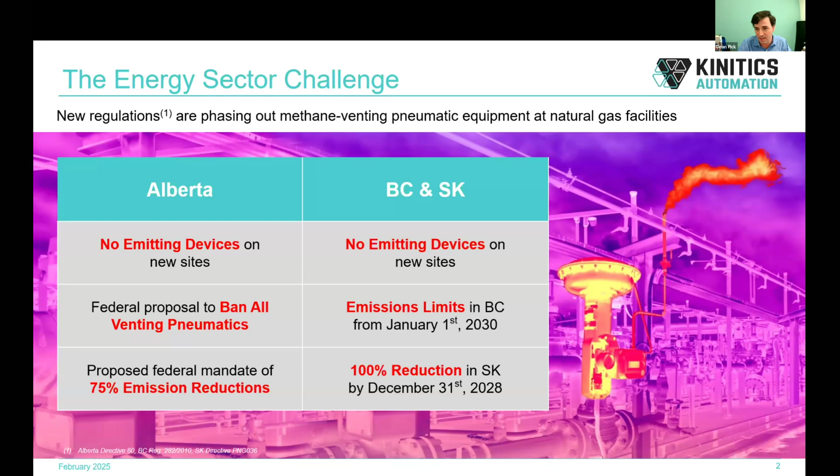So this guide is meant to be for EPCs and packagers and producers who are planning new infrastructure projects such as new wells, etc., that want to maintain compliance, but obviously don't want to completely reinvent the wheel when it comes to existing designs that they have tried and tested. It's also relevant to companies that are looking to address their installed base of venting pneumatics.

So to provide a little bit of an introduction to the issue, the source of methane emissions from these devices, when it comes to control valves, which is a large percentage of the source of these gases, is the practice of using gas from the pipe, sometimes referred to as fuel gas, natural gas, or methane, as the gas that runs pneumatics. So pneumatic controllers, mechanical computers you could think of them, basically use this gas to control the position of control valves, shown here schematically as a cross section.

And these controllers effectively utilize the gas, but they don't destroy or consume the gas. It is a pass-through system where ultimately, once the pressure is spent, in addition to other escape mechanisms that occur, you now have a source of venting, either continuously or intermittently, depending on how the system is set up.

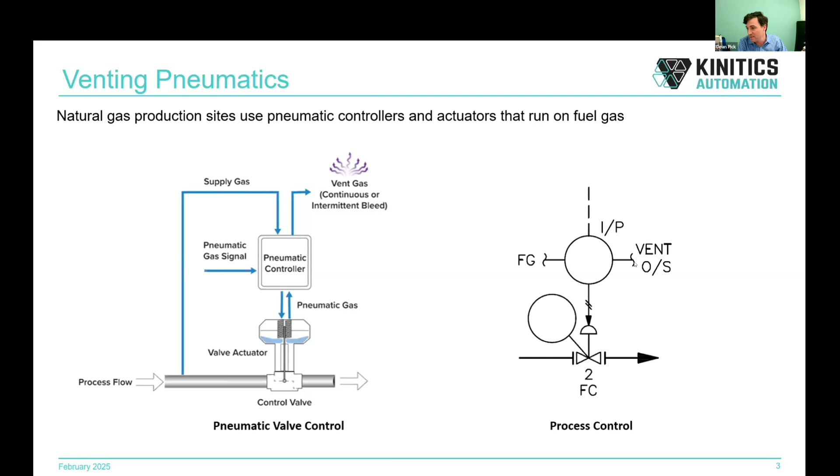These are the gas that's used to control that valve, and then vent OS, or vent outside, is sort of that telltale indicator that you're running a pneumatic device at that facility. The control in this particular example, I/P, is where you've got current control, i.e. a 4 to 20 milliamp signal coming from your SCADA system or PLC system, driving the pneumatics, and that's effectively controlling, in a lot of respects, the flow of that methane gas out to atmosphere.

Now, if we look at how to address this, either for greenfield projects where you may not want to reinvent the process, or for projects where you're looking to reduce your venting volumes. In a lot of cases, the valve itself is not the culprit, or is not necessarily the target for addressing these venting volumes. It's really the actuation system, the pneumatic actuator and associated controller that needs to be addressed.

So there's a lot of benefit and value with reusing that valve. So really the attention turns to the actuator. What can we do to automate this control valve in a way that doesn't introduce venting pneumatics? So we're going to, through this guide, address different considerations such as operating environment, mechanical interfacing to the existing valve, how you're going to power and control it, as well as safety considerations.

So in this guide, we're going to use the Kinitics KVA38 as an example replacement. So this is a zero-emission electric globe valve actuator that features a built-in return spring, suitable for new sites as well as brownfield retrofits. That's been designed to provide the lowest cost of ownership to the users, both from a combined consideration for CapEx, but as well operating costs.

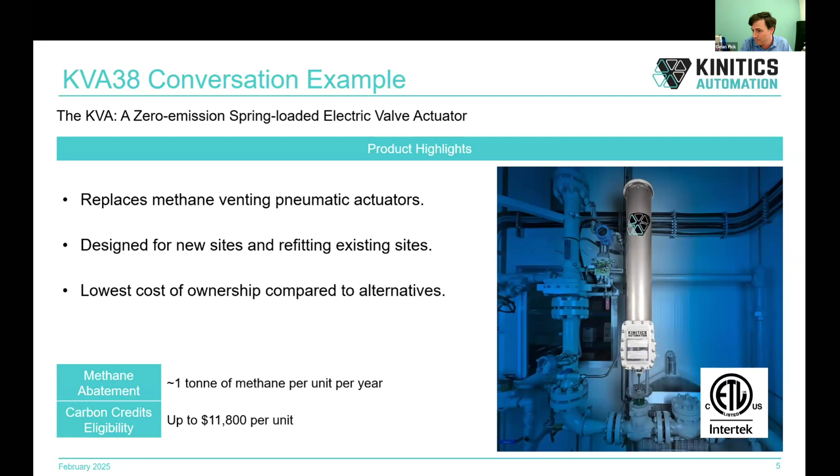So let's start at the valve. First step is looking at the valve travel and thrust requirements. Travel is usually the easiest thing to find. Pull up your valve spec, pull your valve list, and you can usually identify the type of valve it is and how much lift there is.

Sometimes you might find a special case where the valve may be rated to travel 3/4 inch or 19 millimeters, but in your operation has been intentionally limited, let's say to 1/2 inch of travel. So you can then choose to acquire an actuator that can either do the full lift or just the limited lift that the application requires.

The other component is thrust. So important to remember with globe valves, they work up and down as opposed to a rotary valve, which is turning or torquing. So you need to consider how much thrust you need in order to basically keep the pressure in the pipe, so to speak, when the valve is closed. So you need to look at the type of valve, whether it's balanced or unbalanced.

In this case, we're showing an example of a D-body valve. So this is an unbalanced valve where the pressure is being held back by a plug that's seated into a valve seat. And when it's holding back pressure, with the pressure side shown on the left here, you have to develop at least enough thrust to overcome that unbalanced nature.

So that does include, I'm going to skip to the third point here, the maximum differential pressure. Look to your process flow and P&ID, look to your design to understand what the possible maximum differential pressure across that valve is. You combine that with the port size, otherwise known as orifice size, which is taken as the cross-section, at least in the unbalanced valve, of the plug.

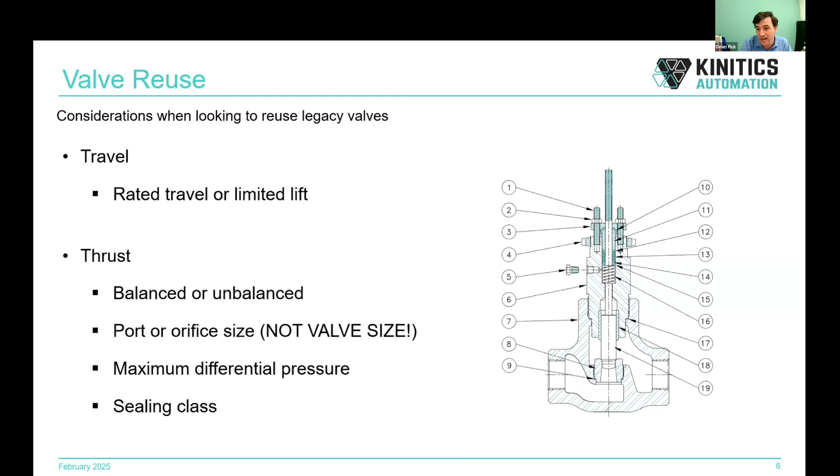And then another consideration is the sealing class, just how tight that needs to be. Again, we're not suggesting any change to the, let's say, tried and true process control. It's more of get the data you need in order to evaluate an actuator for replacing the venting pneumatics.

Other considerations include the operating environment. A very important safety and jurisdictional regulation consideration is the hazardous area location. In Canada, we're now using the zone system. So look at your zone rating, could be zone 1 or zone 2. In the case of the Kinitics valve actuator, it's rated for class 1, zone 1, so it's applicable in either zone 1 or zone 2 configurations, as well as div 2 for the legacy sites.

You can also look at the temperature range, especially the low temperature range, for those who have some experience with exposure to the weather. We just need to step outside today to kind of feel what that is like, and it can be rough on some equipment. In the case of the Kinitics KVA38, it's rated down to -40 degrees Celsius, so it can handle the cold. It can work in outdoor climates or outdoor installations. And it's good for up to 50 degrees Celsius. So it covers a wide range of operating temperatures.

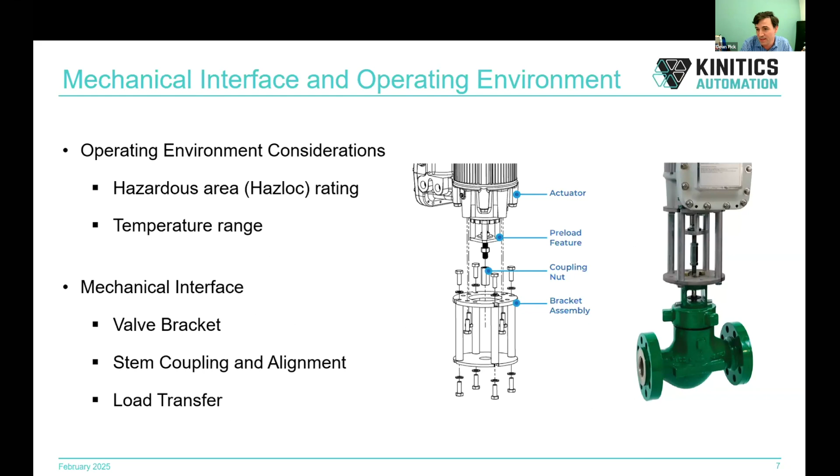Obviously in greenfield, when you can do it in a shop install. But if you have information on the valve, we can use that to identify the right hardware to allow you to couple the stem, mount to the bonnet of the valve, and otherwise then transfer the load from the actuator to the valve, i.e. that's the load of the internal spring, which can then do its job, keeping the pressure back in the valve.

Now look at power systems. 120 VAC or 24 volt DC has a lot to do with your on-site infrastructure. The consumption or the power demand is always an interesting conversation. It really comes down to what your process looks like. So consider your process. Whether you're doing dump valves, so intermittent lifting and dropping can be very power efficient on a snap acting case, or if you're looking for constant modulation for back pressure control, for example, also a consideration as well. So bring some process information and we can help you with power demands. It is not a simple answer in any case.

As far as control system interfacing, the example we're using today is an analog input. So we're going to use 4 to 20. Serial communication or discrete points are also available. And you can now maybe also start to explore some automation enhancements. Position feedback, something maybe not available before, to actually tell you where your valve is, as opposed to just commanding it and hoping for the best, as well as advanced diagnostics to tell you how the actuator is doing and potentially even the health of the connected valve, all providing you with intel that you might not have otherwise had with your old infrastructure designs.

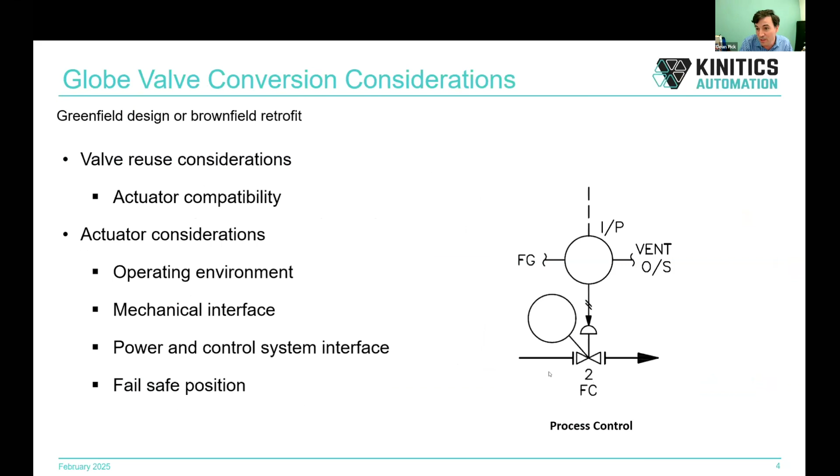And lastly, fail-safe is a key consideration. If we go back to that image of the process control, FC here stands for fail closed. The number above it, 2. That's a 2-inch valve. Again, remembering that that's not a 2-inch port. So how to achieve fail closed? With the Kinitics valve actuator, it is a spring-loaded valve. So if you lose on-site power for whatever reason, if you lose a control signal, even when the actuator is in a cold, dead state, the internal spring will return it to the closed position. This is very much like how the pneumatic example at the start of the guide is operating, and this is how the KVA 38 works.

If you're looking at alternatives such as motorized operated valves, you're going to have to consider other things such as the super cap or battery backup that is essential to providing an alternate form of power if it goes dark, that is site going dark or actuator going dark. Of course, none of these solutions can replace whether the motor fails, in which case you're dealing with a fail in place and it has to be picked up in your HAZOP studies.

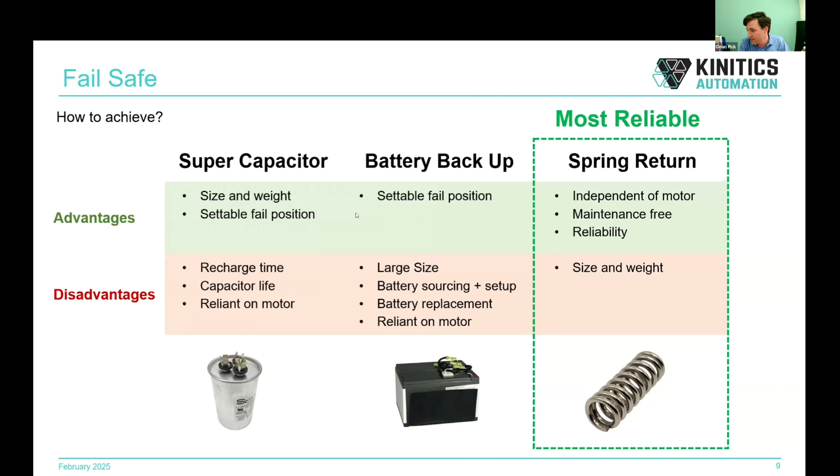So ultimately, it's up to the designer how they're going to achieve fail-safe, keeping in mind the additional CapEx that might come with some of the battery or super cap backups, in addition to the additional control systems that require detection and smart switching to swap these systems in. Alternatively, you can stick with the fail closed feature of a spring and take some comfort in that sort of tried and true method.

So at the end of this guide, let's take a look at where we ended up, and perhaps let's also see where we started. We have either a legacy or greenfield globe body valve with a pneumatic controller on top. Really, neither the valve nor the actuator is particularly relevant in this case, but here we're trying to maintain or reuse that valve, and by switching to an electric actuator, we've kept the valve in place, saving either engineering time or equipment cost. We've eliminated the source of methane venting, so we now have a zero bleed arrangement. And if you've set up additional, let's say, connections to the device, you've potentially now realized better automation through feedback and advanced diagnostics.

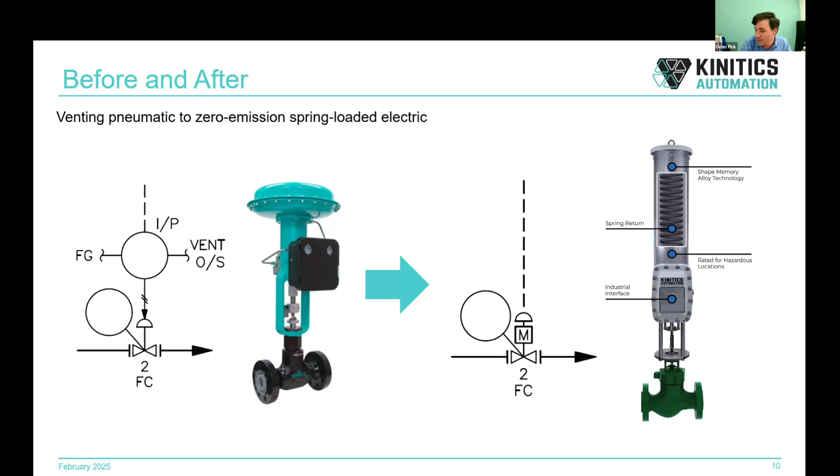So we present this solution and guide as a way for you to apply this to your separators, your artificial lift systems, pressure stations, blenders, metering skids. Really, it is applicable across the range for any automation system.

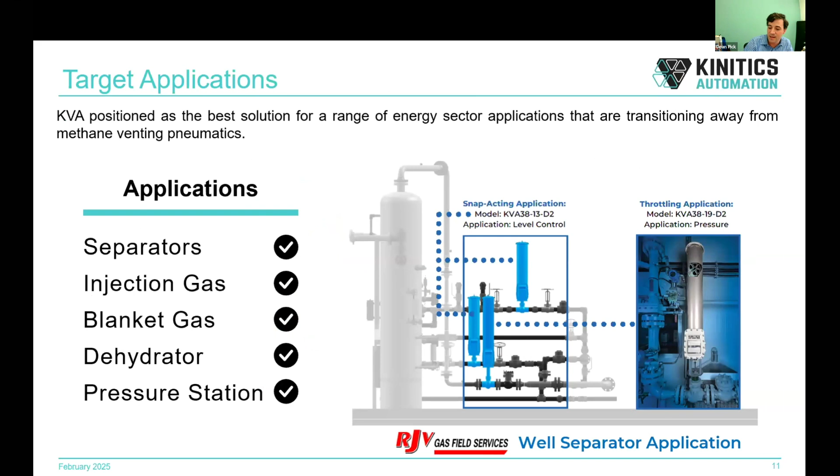So with that, I'll hand it back to you, Allan. Thanks very much, Dean. This is fascinating stuff.